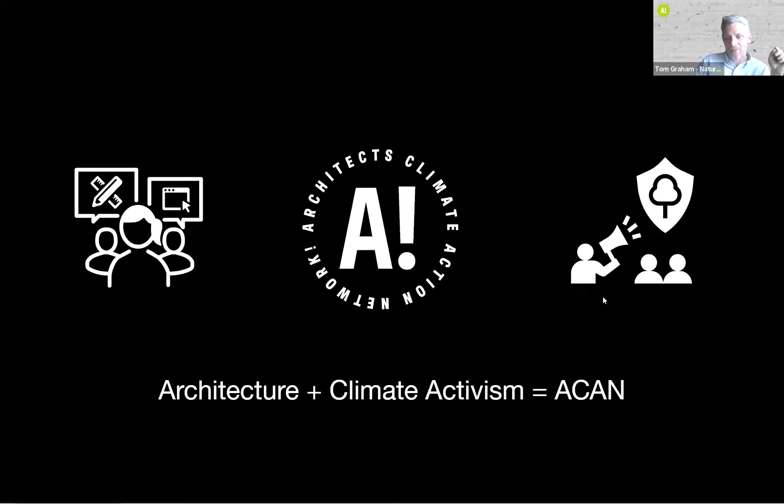And cultural transformation. We call for a complete remodelling of our professional culture. We must challenge and redefine the value systems at the heart of our industry and education systems. We seek to operate an open network to share resources and knowledge to aid in this transition.

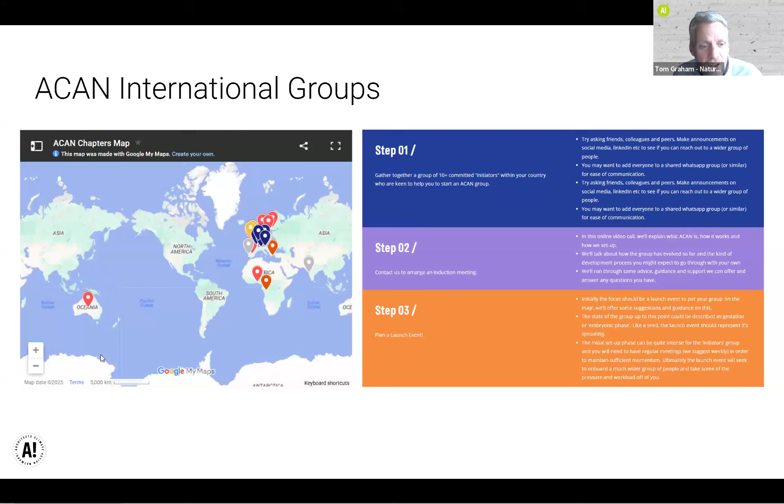So yeah, ACAN's actions take a bunch of different forms, from campaigning, lobbying, and the creation of resources and content. Very much right now, the ecology group have put together a public statement on the rather shocking planning and infrastructure bill. The existing buildings group have developed the UK demolition map, which is a crowd-sourced map of buildings at threat of demolition.

And again, the same group, existing buildings, have the Hug the Building event coming up in May. And sorry, the climate literacy group will be hosting their material donut workshops at Buildfest UK in July. So you can see, busy.

The other angle to a lot of our actions is the provision of resources. And the natural materials group are about to go live with a big announcement shortly, with our natural materials details website with free downloadable details demonstrating natural construction. So the sort of things you're going to be seeing tonight from Seb, Janna, and Andy will be detailed on that website. But anyway, that's too much natural materials.

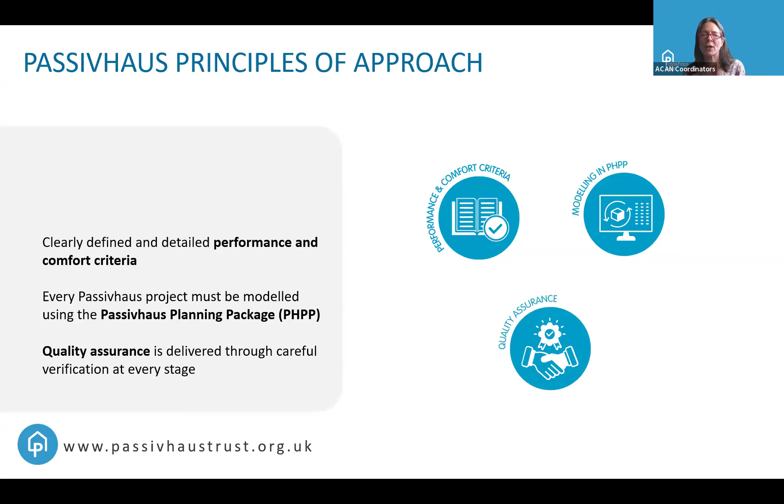So I don't know how many of you know about the Passivhaus standard, but the Passivhaus has principles of approach. It has 3 of them. It's clearly defined and detailed performance and comfort criteria. Every Passivhaus project must be modelled using the Passivhaus planning package. Quality assurance is delivered through careful verification at every stage. And together, that adds up to an integrated approach. So Passivhaus buildings are based on fundamental principles that must form part of that integrated approach.

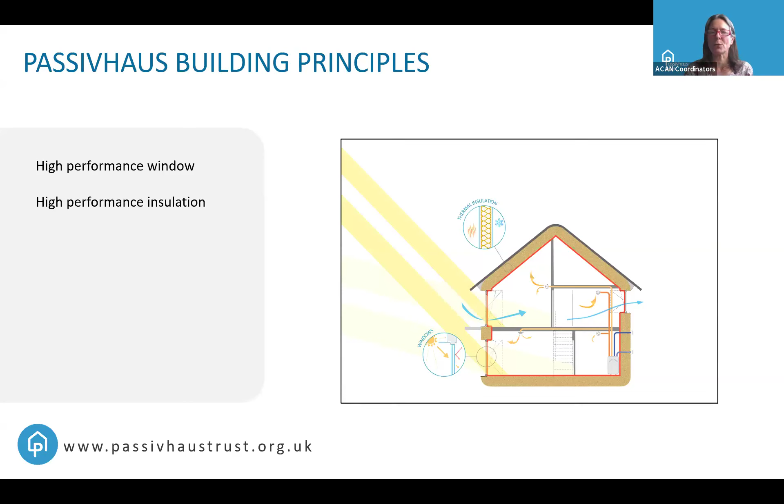There are Passivhaus building principles, of which there are 5. High-performance windows. High-performance continuous insulation with no gaps, a continuous high-performance airtight layer, and minimising of thermal bridges, and quiet and efficient mechanical ventilation with heat recovery, which is MVHR.

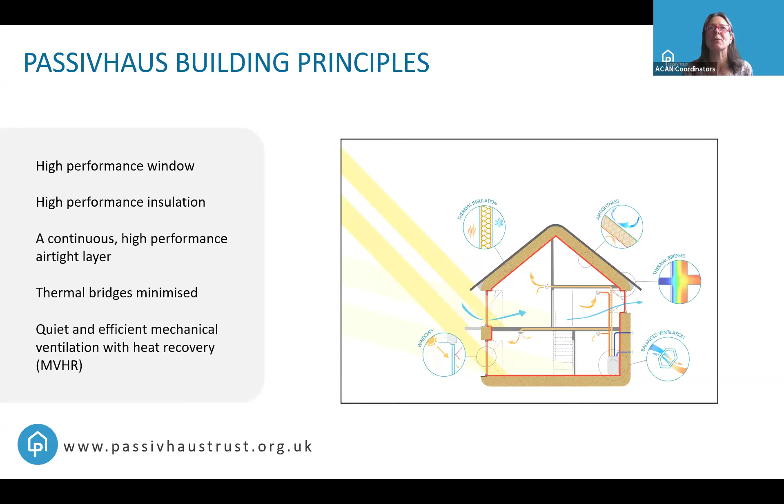Can anything be called a Passivhaus standard? No. It might meet some of the principles, but unless it meets all of them, is designed through PHPP and is quality assured, it is not a Passivhaus.

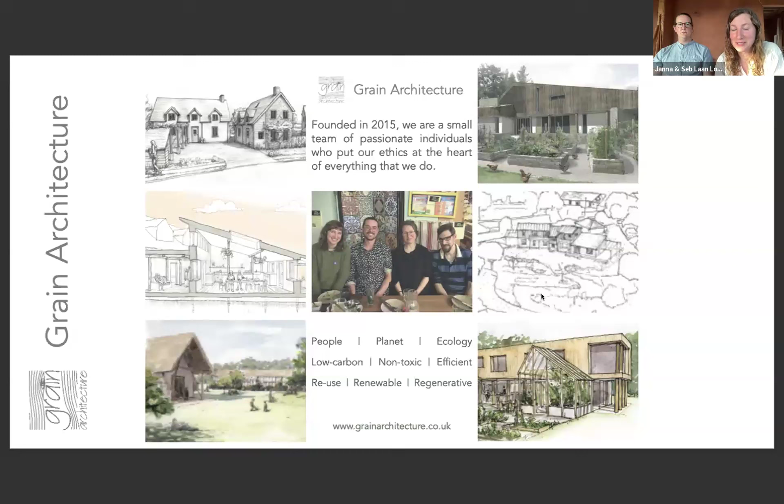yeah, we're obviously here to talk about our house, which is Llama-Croft, a plant-based passive house. Just a little bit more introduction before we jump straight in, but I'm here wearing multiple hats as well. As Tab and Tom have said, I've been part of ACAN as well, but I also founded Grain Architecture in 2015, so nearly 10 years ago, and we as a practice specialize in low carbon building with natural materials, so I have a background in that.

Just to run through a few things that we do as Grain Architecture, we've got many projects that we've done or are doing, from extensions, deep retrofits, working with listed buildings, through to community new build projects. This one needs more funding, so please give to Tuppenny Barn. Shout out.

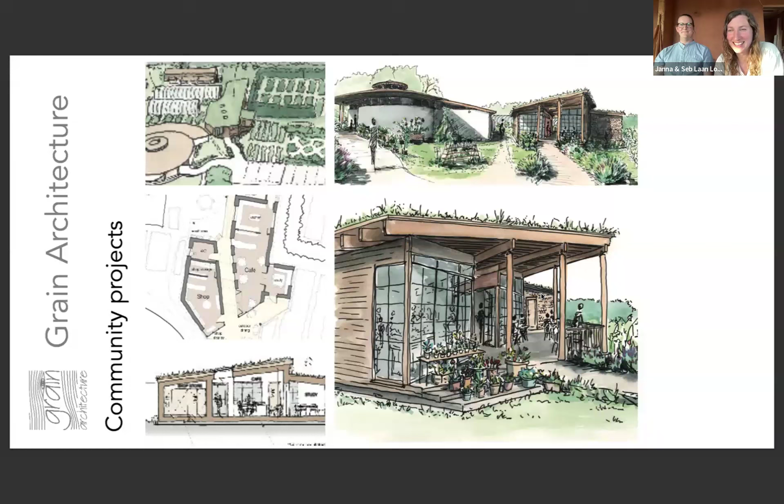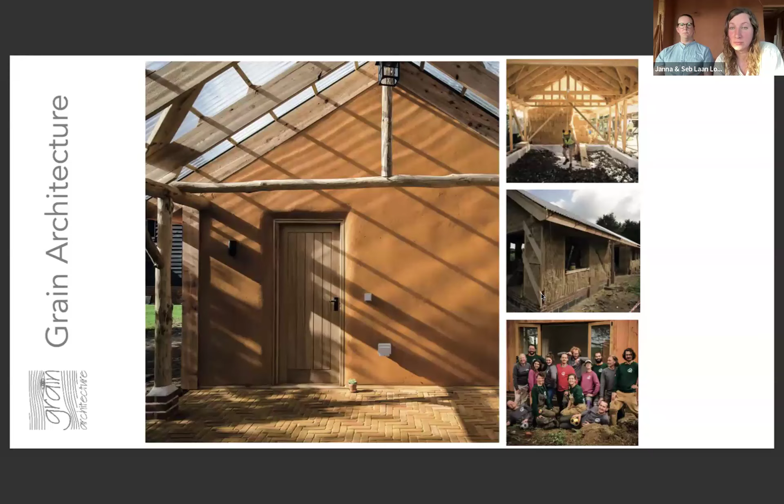So the design of our house is something I've been working on for a very long time. In fact, I was probably about 6 years old when I started thinking about my dream house, and became a bit obsessed, and it's been a pretty lifelong obsession since then. So it's quite amazing to now be at the point when we're sitting in it, which is very cool. I've been working on this design and really trying to refine it, getting a nice simple layout, which I'm very happy with.

And so one of the key principles, as Tab was mentioning about Passive House, is continuous insulation, and also the form factor needs to be quite efficient, so not too large a footprint area for the volume.

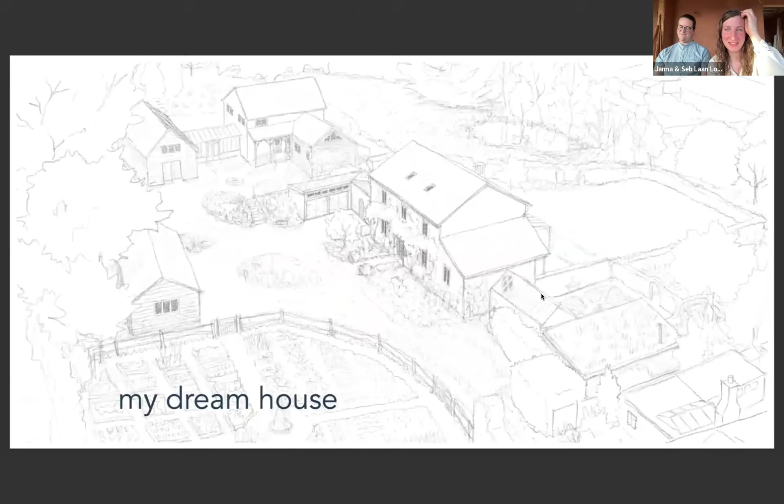So yeah, this house, when I was 6, obviously I didn't know about Passive House, and for many of the years that it was under sort of development, I didn't really think of it as a Passive House, but I always wanted it to be an efficient sort of house that was kind of quite independent and self-sufficient.

So then came along Seb, who I met while studying at CAT, the Centre for Alternative Technology, and Seb works at Archetype, he'll introduce himself, but he's a passive house designer as well, and basically said that it would be okay for me to design our house on the premise that it is a certified passive house. So that's what we set out to do.

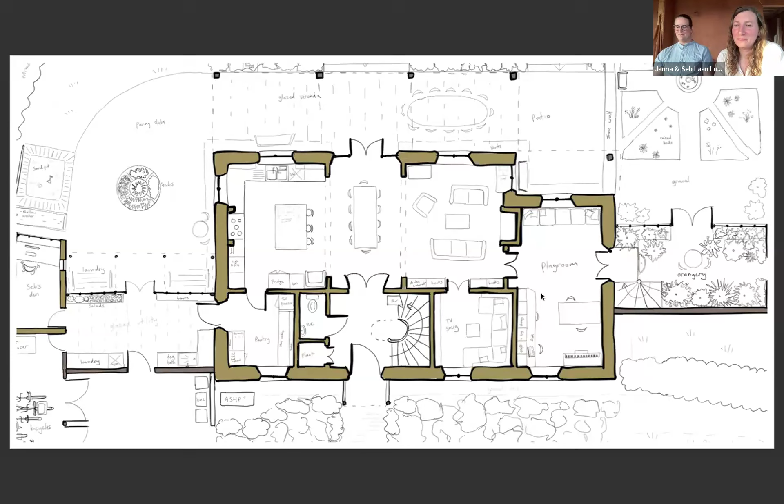So I had the design before the site, which I know is not the right way around, but I've been looking for a long time to find the right site, and this is what we found. And we bought this place in 2022. We're lucky to have found it because it's within a settlement, which is a big issue for new builds. This actually has, as you can see, a little cottage on it. It had a cottage on it. So we had one dwelling on 1.5 acres of land within a settlement outside of the town.

And we've built 2 houses on it. So we've built one for my parents, who I think are on this call.

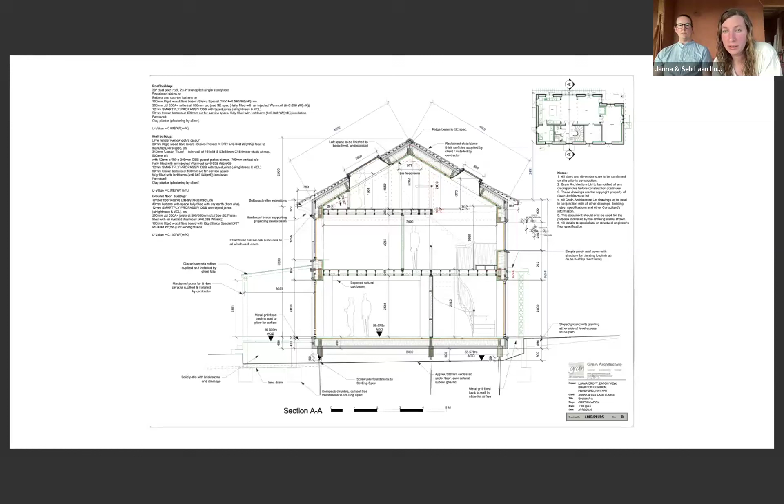So yeah, all sorts of materials, but effectively we're using plant-based hemp fibres and wood fibres, cellulose insulation, lots of reclaimed materials and home, so I wouldn't say homemade because it's clay, you know, but it's from the garden, literally a few feet away.

And I would like to talk more about reclaimed materials and reuse, but I think otherwise I'll be talking for about 2 hours, so I'm going to skip over that bit. But I'll just run through the actual build-ups that we've got.

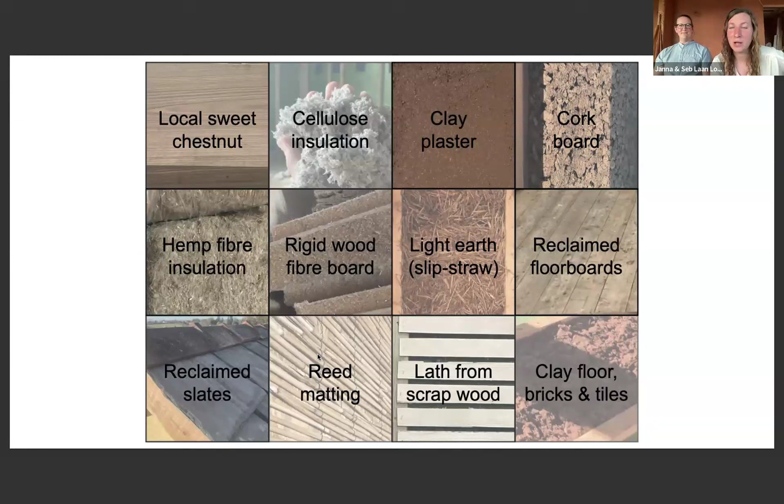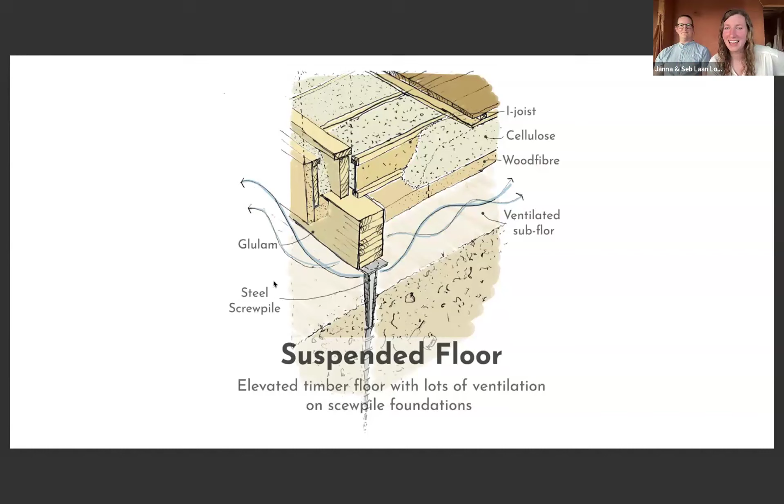Obviously, with the timber floor, you need ventilation underneath, so this is off the ground, and there's a ventilated space, minimum 150 mil, or at least there will be when we finished. And the walls are made very similarly, and this is where, when we were at Future Build, I showed the actual sample panel, which I have sitting here because we've got like a mock-up of our wall.

But effectively, we've got two studs creating the frame. There's an inner stud, which is 140 mil, and an outer stud of 63, I think. And that creates the separated frame, which minimizes thermal bridging. Thermal bridging, I can't really explain too quickly, but effectively it's the passage of heat transfer from one side to the other. So that's what we're trying to separate as much as possible and have continuous layers.

So there's continuous cellulose going through all these gaps in between the two frames, and there's also this continuous wood fibre board insulation. The cellulose, I think, is 320, something like that. The walls and the floors and the roof are 300 mil, and then the wood fibre board insulation is 80 mil on the walls and 100 mil on the roof and the floor. We didn't actually end up insulating the service cavity, but that's because we just did such a good job of everything else. We didn't need to.

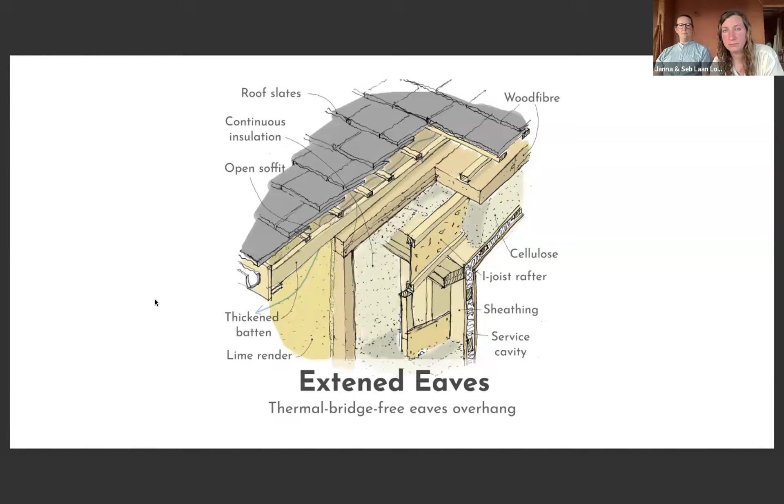We've also, you might notice, got no membranes in our build, no breather membranes, and that's for minimizing plastic, but it's also to enable the roof space to be a bat-friendly roof space. And the insect mesh is also set back to the end of this angled sprocket here, which means that about a third of the roof is given over as a bat-friendly space, and birds as well.

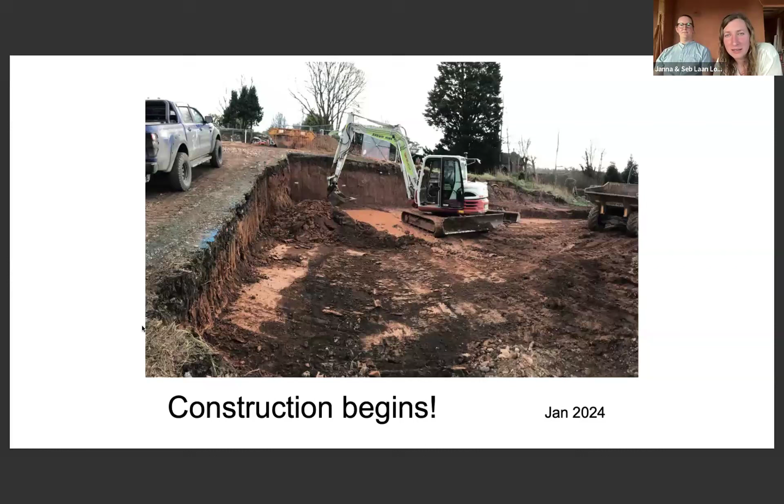So now I'm going to run through quite quickly because of time the photos of construction. So this is when we actually began, and that was January 2024. And there was a lot of clay, a lot of clay. It rained for about 4 months solid, so we had so much mud and clay on site. I know they hadn't put the stone down. This was the old driveway, that's what it was. It's changed so much. But yeah, so that was January.

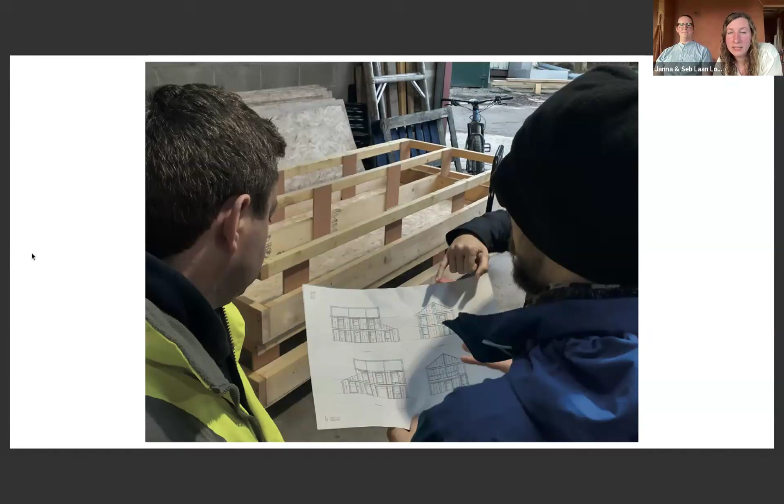Meanwhile, whilst the groundworks were going on, the panels were being made off-site. So this is the sort of workshop where the builders were working. You can see 2 of the panels in the background here that have been put together and ready to transport. Then I think it was March that the screw piles went in, and Seb will talk a bit more about the screw piles, so I'll skip over that.

I think I would have felt a bit worse about digging so much if we had really healthy topsoil that we were then exposing and killing by digging, because it's not actually that great to dig too much. But given that we had no topsoil, it was an opportunity to do the groundwork and now build it up.

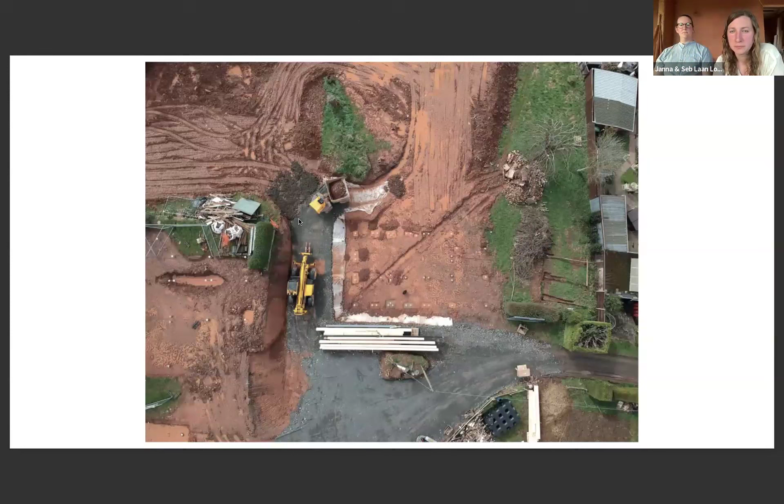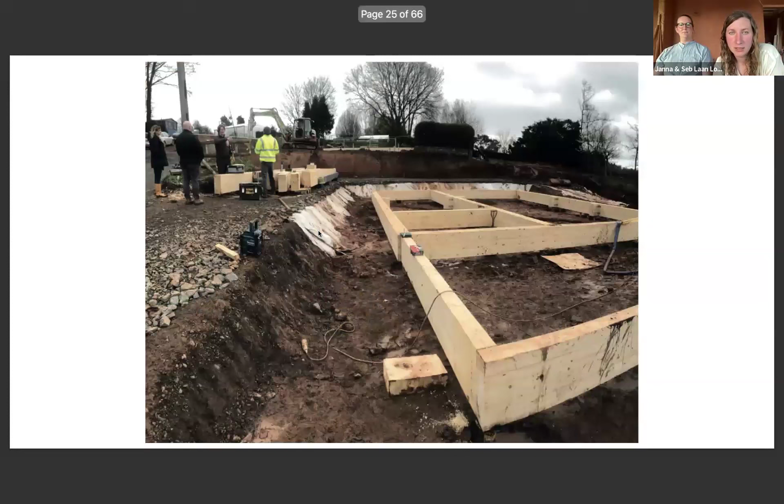So yeah, this is when the glulam ring beam went in, sitting on the screw piles. And there you can see it sitting there on the mud. And somebody had the fun job of climbing underneath and fixing the wood fibre board to the underside.

And you might notice that the floor joists and the wood fibre board layer is actually all sitting on top of the glulam ring beam rather than within the same plane. If it was in the same plane, you would need joist hangers effectively, and we wanted to minimize joist hangers as much as possible. So that was a reason, but it also made it much quicker on site to build because it was sitting things on top. And there you can see the wood fibre board.

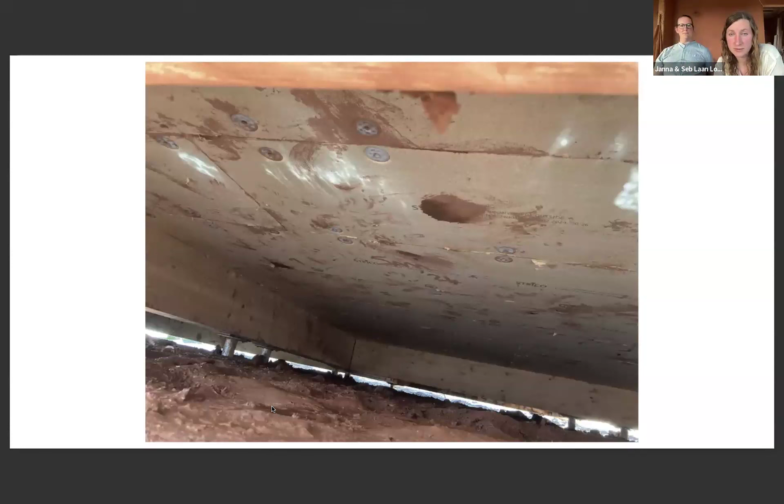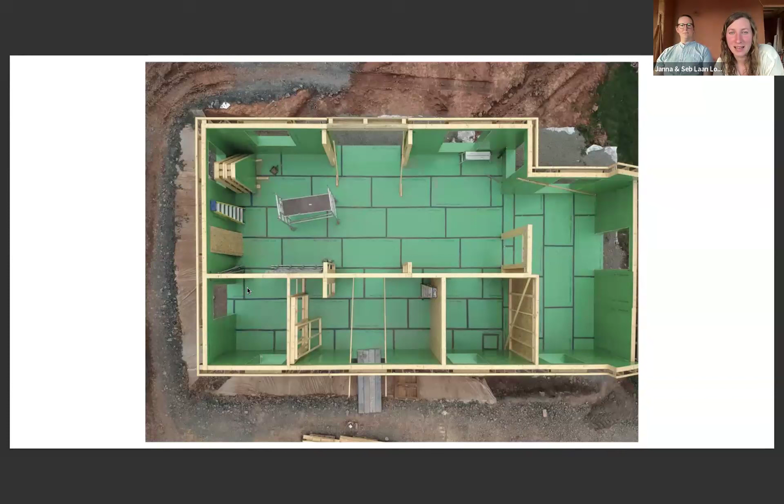Then very quickly the panels arrived for the walls and up they went in no time at all. We had a ground floor and it was, yeah, a really exciting, big moment. It kept raining, so it got wet on site, and initially I was very worried, but actually it all dried out and I was reassured, and it's not been a problem.

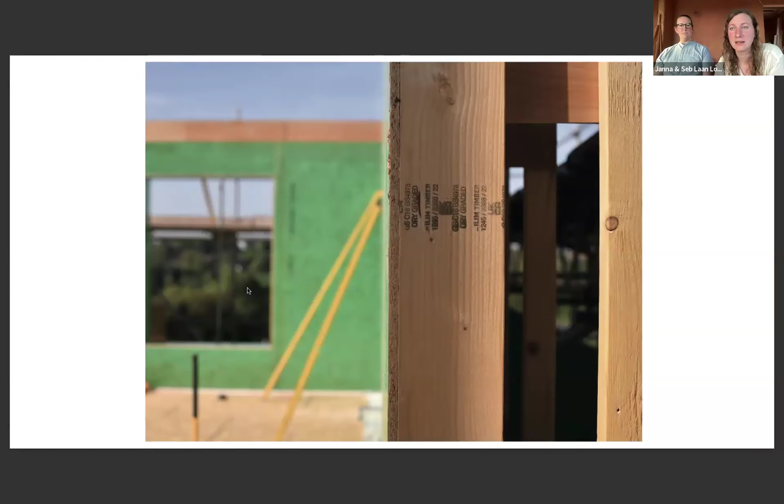And this is just a close-up showing the C16 grading of all the timber. So it's not C24, C16, which means it can be UK. Are you going to talk about that? Right. Yeah, so C16 means that you can basically use British timber, and we have loads of lower grade timber in this country, but engineers like to spec high grade timber, and that often means you have to go abroad to get it. So it was really nice to be able to do almost the entire house using C16, which enables that locally sourced timber.

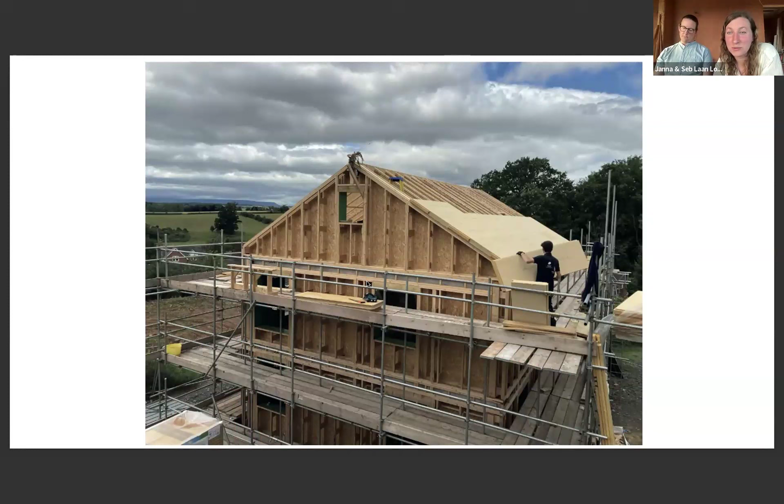And then the wood fibre board went on, and that instantly gave us rain cover, and it then sat there exposed to the rain. Wood fibre board does amazingly well at this. It's something that you might think is very susceptible to water damage, but actually it can be left out for a very long time in the rain, like months, and it's been absolutely fine.

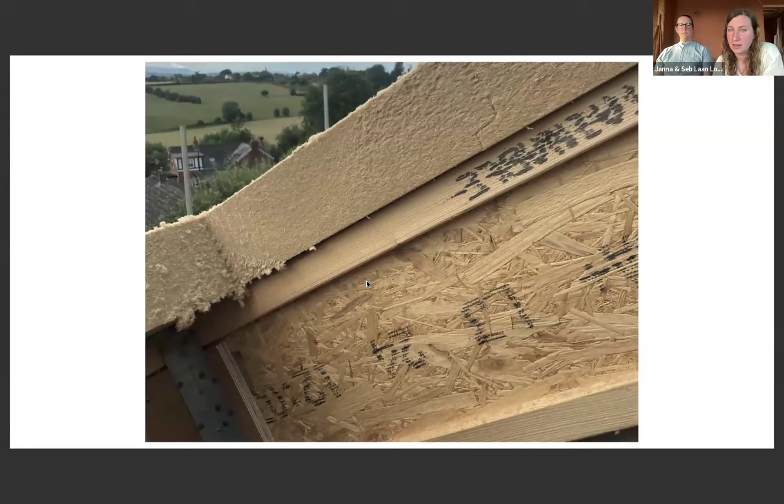Then we had some slates. I really enjoyed finding some nice reclaimed slates. And just for comparison, you can see my parents' house in the background there with its new Spanish slates compared to our far superior reclaimed Welsh slates, which apparently came from a castle in Wales. I need to find out which one. It's very exciting. They're huge, heavy, and they're all slightly different.

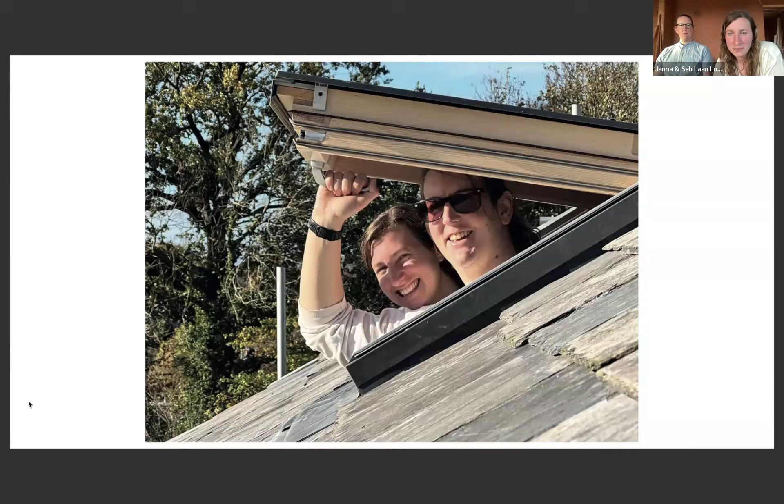And I insisted that they put them not perfectly, because I like things to be textured and imperfect and handmade, rather than looking like it's all too flat and machine made. There's Seb putting some moisture meters in. He's going to talk more about that.

And then the windows arrived. So we're now into the summer. Well into the summer, actually. It was August or September even, I can't remember. And yeah, windows and doors all went in. These are all triple glazed timber windows and doors from 21 Degrees. And there weren't a lot of options with this, because I was looking for a timber window and door, not a composite material, and not with aluminium on the outside, just timber really.

So yeah, not as many options out there, because a lot of the high performance windows actually are more composite, but these are made of Accoya timber, which is very stable. But that means it's engineered timber, so we went for a painted blue colour, because if you leave it natural, it doesn't look as you would think a timber window would look. You can see the kind of finger joints and things. So we decided that actually painting it was the best thing.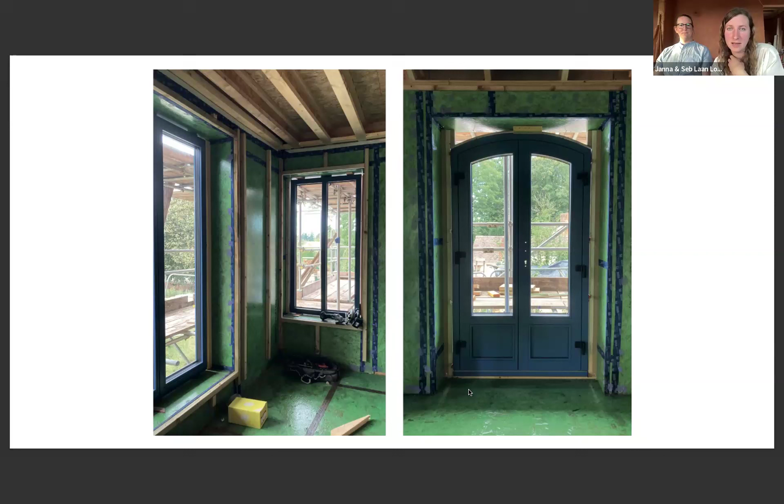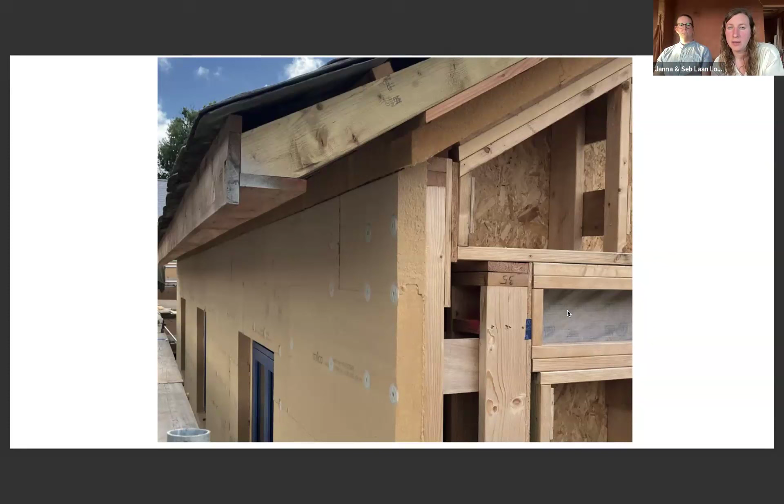Meanwhile, we were seeding up lots of lovely wildflowers and growing things, and as I said, building up the soil is important to us. We're also doing a lot in the garden with vegetables and things like that as well, planted an orchard and things.

Meanwhile, this was in the summer, late, we're now into autumn I think, when the render finally arrived and went up. So we've used lime, and you'll see that lovely rounded corner there. That was hacking away at the corners because I didn't like sharp edges. Normally you would have a sharp edge and a plastic beading to strengthen the corner, but I went at it with a knife and took the corner off, which means that you don't need the plastic beading. So that was a nice little win.

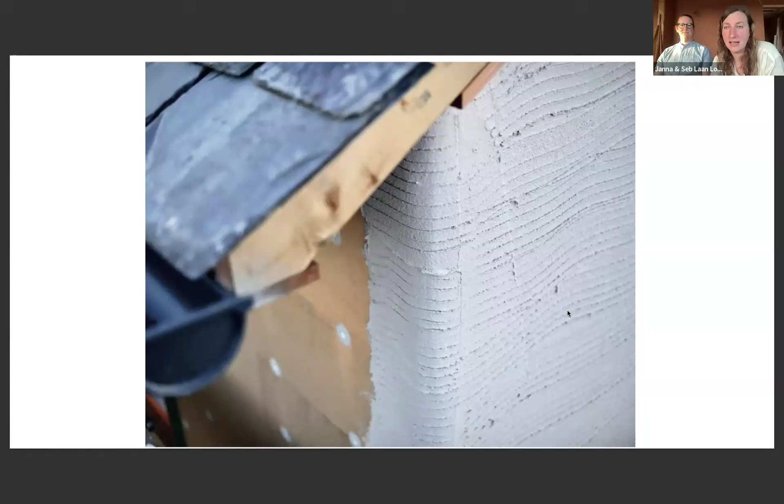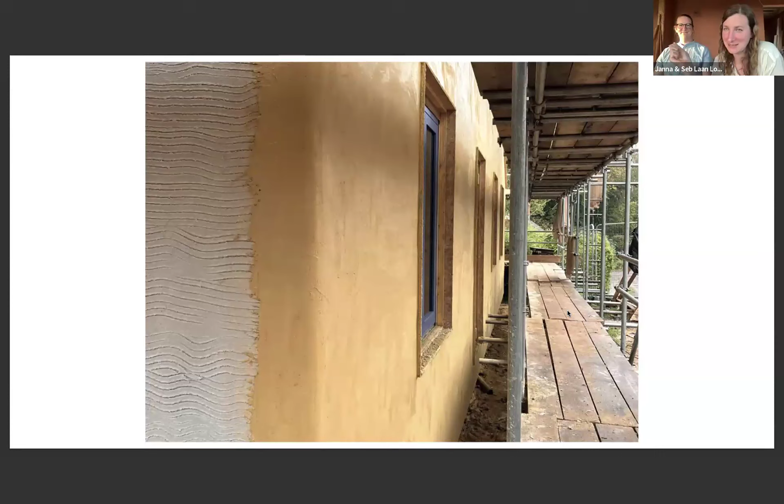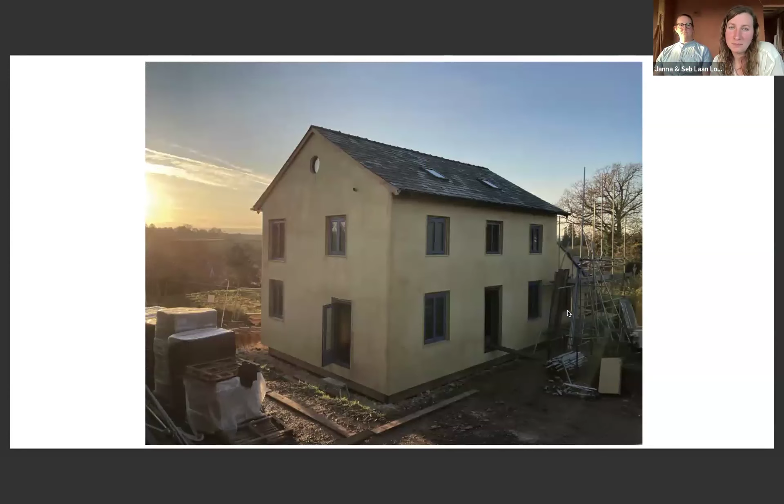And then the render goes on in 2 coats with base coats, with a scratch in it, and then the top coat goes on, which we went for a pigmented top coat so that we don't have painted render. It's also done very roughly on our instruction, rather than perfectly smooth and flat as they wanted. We wanted it a little bit more rough and ready, which I really like, and I think it looks much more characterful and rich. So that was it, looking rather lovely.

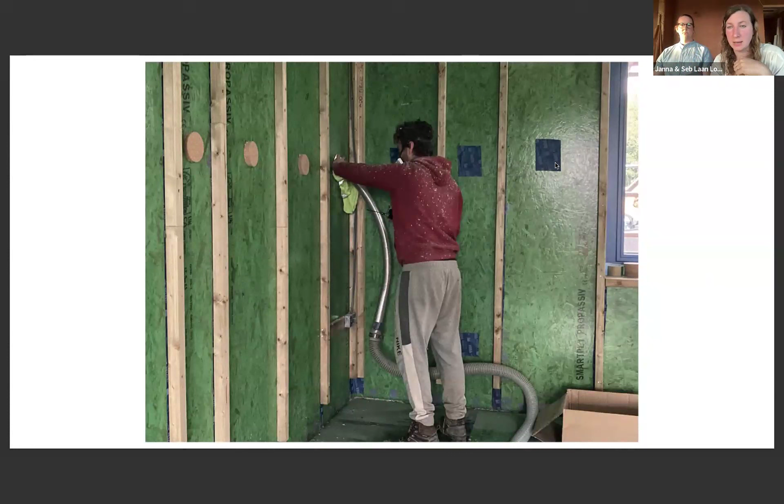And then this was getting up to Christmas when we got partial possession. Actually, just before that, they insulated the inside. That's all to do with the shell. Then we come to the actual insulation, which is pumped into all the voids after the shell is complete. They do this from the inside by drilling a hole and putting the cellulose machine in, pumping it full, then slowly pulling the nozzle out when it's at the right density and pressure, and then they tape up the hole with this blue airtight tape. And here you can see the cellulose made from shredded newspaper.

And then basically we got to take it from there. So all the insides we are doing ourselves. For some of the internal walls we were putting light earth in, and light earth is a mixture of straw and clay slip, and you coat the straw very lightly in clay slip. We were doing this in the internal walls for acoustic insulation, but also thermal, and also a plaster carrying surface, and it costs next to nothing. It takes a bit of labor and a bit of time to dry, but I'm really happy with the result personally. It's been really lovely to work with.

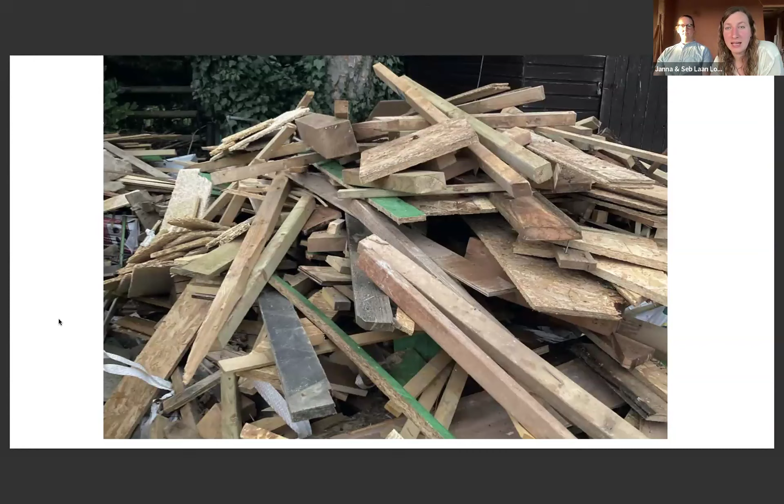But this is what we get from a building site, even the good ones. There's a lot of waste, a lot of offcuts, and yeah, it's very frustrating. I hate waste, so I've been, much to my parents' dismay, having piles of scrap material everywhere. But this is a really valuable resource as far as I'm concerned, because we've been ripping this up into lath and stapling it onto the walls and then plastering onto it, which has worked really well.

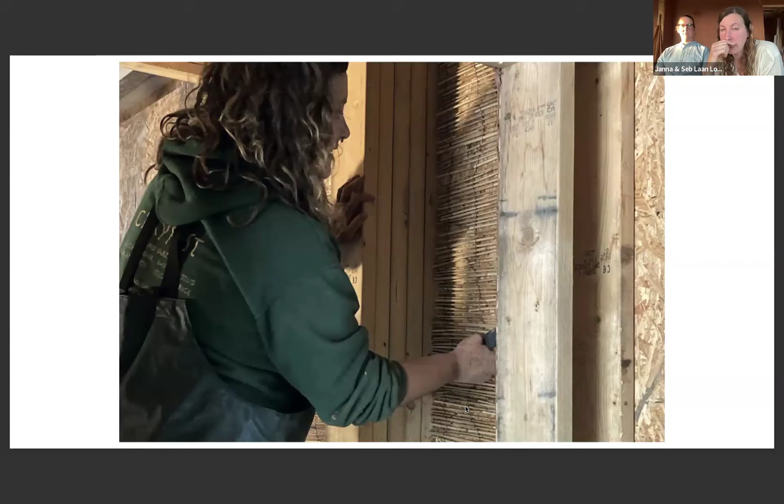We've also been using reed matting. So this we were stapling straight onto the OSB board, the sheathing board on some of the internal walls, and then again plastering onto that, and that worked really well. So yeah, mixing up the plaster, we've got clay, lots of clay, plenty of that.

We very simply mixed it with water, made it into a nice thick clay slip, poured it through a sieve to get the bits out, and then let it settle a little bit to get the right consistency, and then mixed it with fibre. And we had the fibre as well, because we've been using the waste from the wood fibre board.

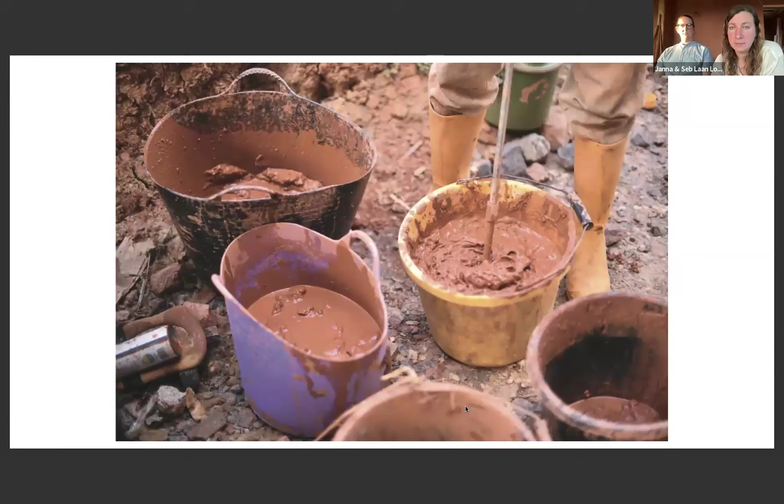I haven't got a picture of that, but the wood fibre board that we've been using as insulation, every time you cut it, it creates this kind of very fine fibrous dust, which is lovely fibre for plaster. And you can sort of see the flecks of fibre, it's very fine, but it works really well, and I highly recommend it. So yeah, we put that onto the reed, onto the light earth as well, and onto the lath.

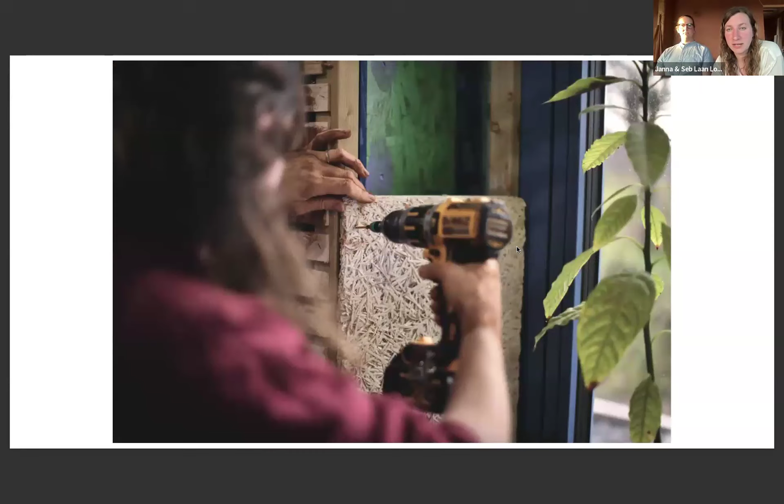And then yeah, so this is our kitchen. You can see there's a bit of a light earth wall here, but then the external walls we used the lath to cover, and then we've done this detail around the windows as well using scraps. So this is wood wool board, so that's waste. It was dug out of the skip, but that is perfectly good for creating sort of small patches around the windows and doors.

And then you can see the lath all over the walls, and then we've sort of given them a quick brush with clay slip just before plastering, because that helps with keying. But yeah, we've had loads of volunteers come and help with this, and it's been really good fun. And that's it plastered, which is looking lovely.

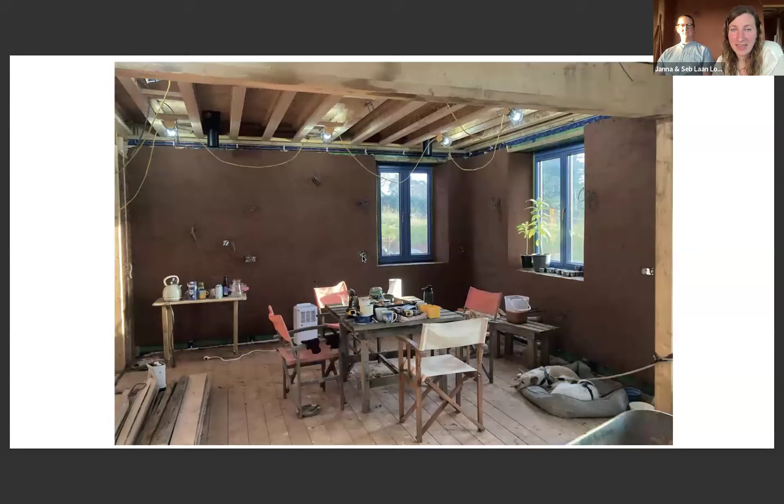Yeah, and then skip forward to a photo I took yesterday, and we've actually now painted the walls. We've got the ceiling plastered, and we've put a bit more of a camp kitchen in for all our volunteers who keep coming and helping out. So shout out to anyone who wants to come and volunteer, please do. We've got a lot more to do still, so we would appreciate more help.

Yeah, it's been a really nice journey, and it feels so nice in the house. It feels so comfortable, and everyone comments on how it just feels good. The smell is right, and it's something about it. The atmosphere is really lovely. So yeah, come and have a play with some clay with us.

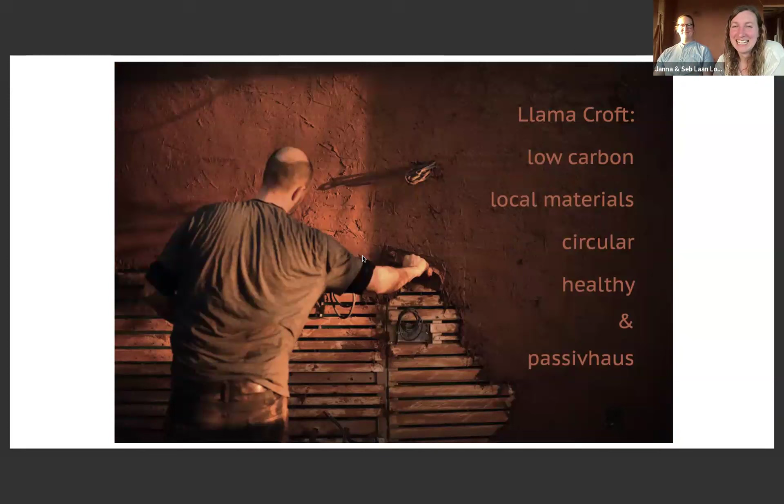That is it. I'm going to pass on now, I think, to Seb. I'll just switch over. Hang on. Shall I? I'll just start sharing again with Seb's. Brilliant. Yeah, thanks.

Good evening, everyone. It's really nice to be back on an ACAN call. Janna and I were reminiscing. This is basically how we spent our lockdown. Rushing from work, cooking some dinner, and then spending an evening on Zoom with some other people who were too frustrated at the inaction in the industry. I was doing the embodied carbon group and Janna was doing the natural material group, and we were on separate calls. It was hilarious. So it's really nice to get to be presenting back to the community and seeing that it's still thriving.

Yeah, absolutely. So I'm Seb Lomas. I'm an associate at Architype, 3 studios in Hereford, London and Edinburgh. And I'm going to talk a little bit about the screw piles that Janna mentioned, and then also moisture management.

So starting off on the ground screws, this is something that I'm really glad we were able to do. When we were at university, screw piles were seen as the cool, great way of avoiding the huge environmental cost of foundations. And all the projects I drew had screw piles. And then when you're in the commercial world, it's very rare that you get an opportunity to actually use screw piles.

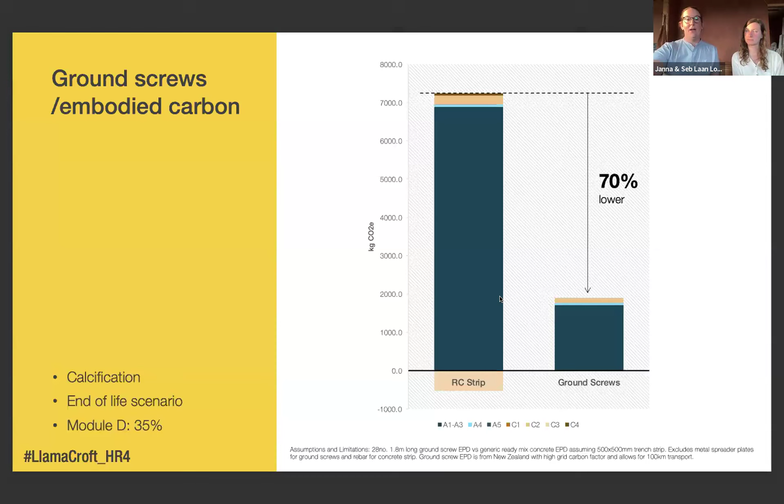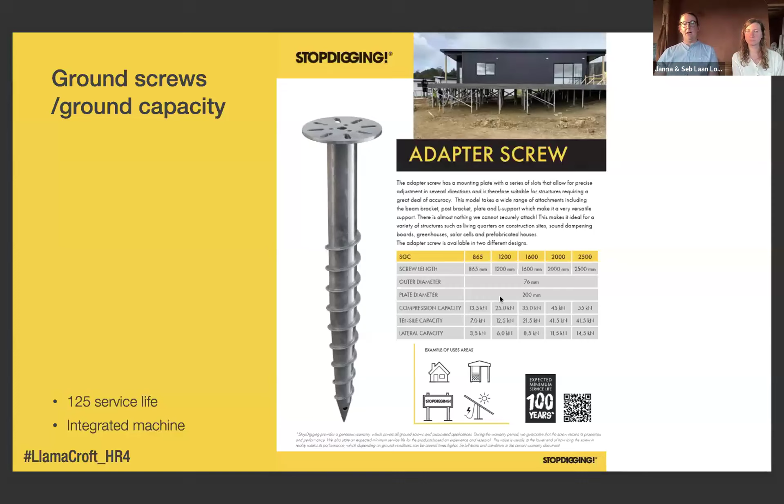And quite interestingly, they can be sized specifically to the loading requirement of the building. They come in all shapes and sizes and have a 125-year service life, but there's no reason why they shouldn't and won't last significantly longer than that. And they go in the ground with basically a massive screwdriver, which is an amazingly low tech, fast and cheap solution. And quite interestingly, the contractor we were working with for this project had never used screw piles before. And having done so, they said it was cheaper, easier, faster, and more enjoyable than a concrete foundation.

They've basically said they want to adopt it as a system, and they're now licensed as a Stop Digging installer, and have already looked to swap concrete schemes of theirs to screw piles, which is absolutely fantastic. That said, I've spoken to other people about doing screw piles, and some quotes that people have been receiving are extremely high. I think it was £8,000 for the 2 homes for the screw piles. And I've had friends with garden rooms in London being charged over £20,000 for 10 screw piles. So you have to look around a bit.

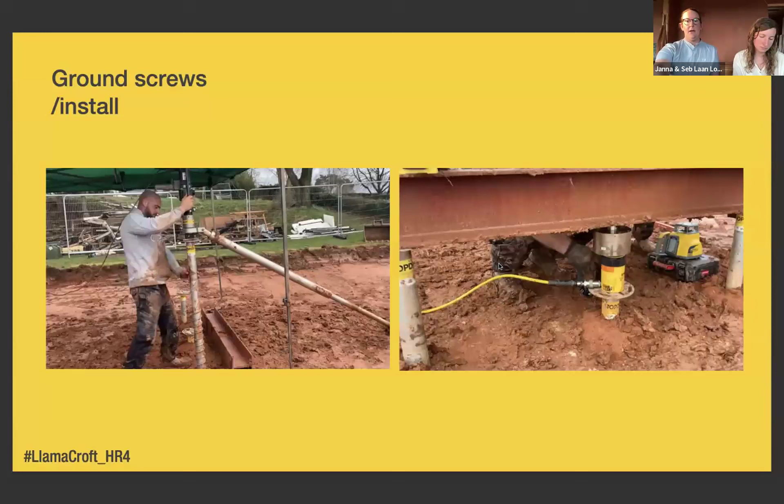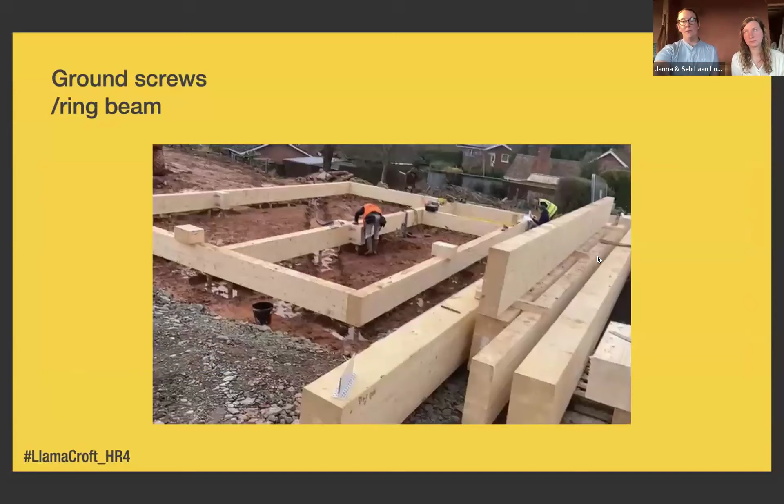And then, as Janna said, the glulam beam very, very accurately sits on top of this. Similarly, I've heard people have really bad experiences with putting in screw piles and finding it hard to make them accurate. And it wasn't our experience at all. And it was really enjoyable to see how precisely everything went together.

So the other thing I'm going to talk about is moisture monitoring. And I don't know if people will be familiar with this, but there was a recent payout of over £100 million for a Sky building, which had a mass timber roof that suffered from water ingress and then was basically condemned. And that single payout means that there are now more losses from water damage than fire damage as an insurance model, which basically means that when you speak to an insurer now, the primary concern is not fire, it's water.

And it's quite interesting because for the last couple of years post Grenfell, there's been a lot of energy in the industry about addressing the fire concerns. And there's been a fraction of that focused on water. And there's a lot less guidance out there. I've put the mass timber insurance playbook up there because it does have some information in there about water. But there's a big gap in the industry when it comes to sufficient guidance for designers taking it through a design scheme and courting the insurance market, as people put it.

But positively, there are some insurance providers who are very keen on the idea of using data to drive insurance profiles. And I know an insurer who basically says, well, if you show me the data that your building is dry for a year, I'll give you a lower insurance premium, which I think is really exciting. And also builders are quite keen to have the data on their buildings, because then they can tender for the next job and say, look, we've delivered dry timber buildings and here's the data to back it up. So people are quite keen on the idea of getting this data.

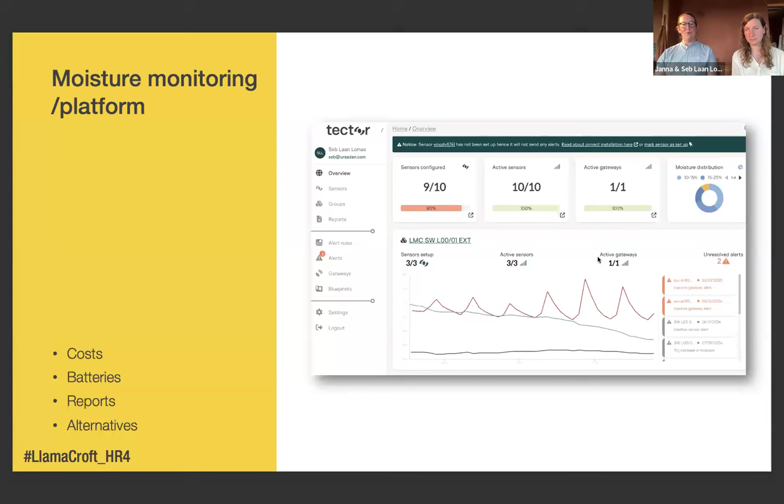The sensors have got a 10-year battery life. So the idea is you build them into the building as you go, recording them as you install them. And then for 10 years, you'll have that operational data. And of course, something could go wrong in year 11, but at least you've got that certainty for the first 10 and the anticipation that things will continue in such direction. The website basically then just live draws all the data. You can automate reports if you were an asset manager or responsible for the building or going for your insurance premium. And yeah, there are other platforms out there. This is just the one that we used.

So as you're building the building, you pick where you want to put your sensors. There's no industry guidance about how many or where. So we did it from what we wanted to learn from the building perspective. You take photographs as you install them, so you've got that record, and then you tag it with all of the metadata, like what have you screwed into, what type of wood is it, insulated, uninsulated, and then it's recording humidity and temperature around the sensor, and the moisture content between the two screws that go into the wood to fix it.

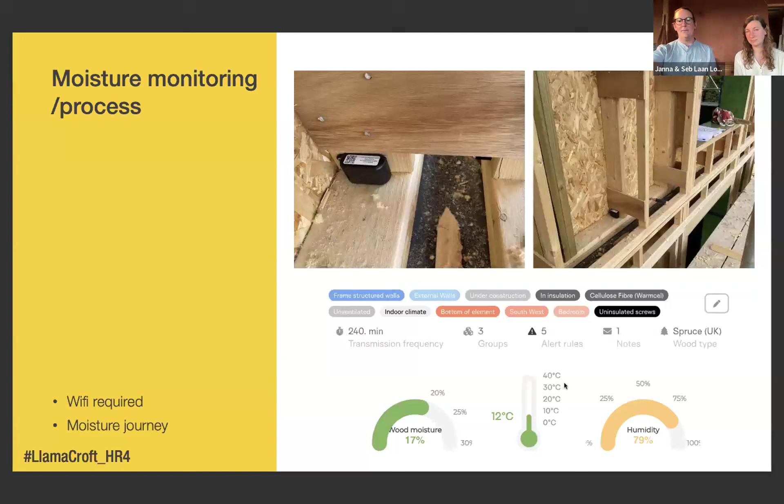And if you wanted to, you can install them in the factory and then actually collect the data as it's going from the factory onto site through the assembly process. So you've got the whole moisture journey of the building, which I think is really interesting, especially when you're talking about mass timber, which is harder to dry out. Fortunately, the section sizes on this house are very small. So even if the timber did get very wet, it did dry out relatively quickly.

So we decided what we wanted to learn from the building. So we've put a number on the southwest wall all the way through the build-up. So we've got the moisture journey through the wall. We've got 2 in the floor, 2 in the roof.

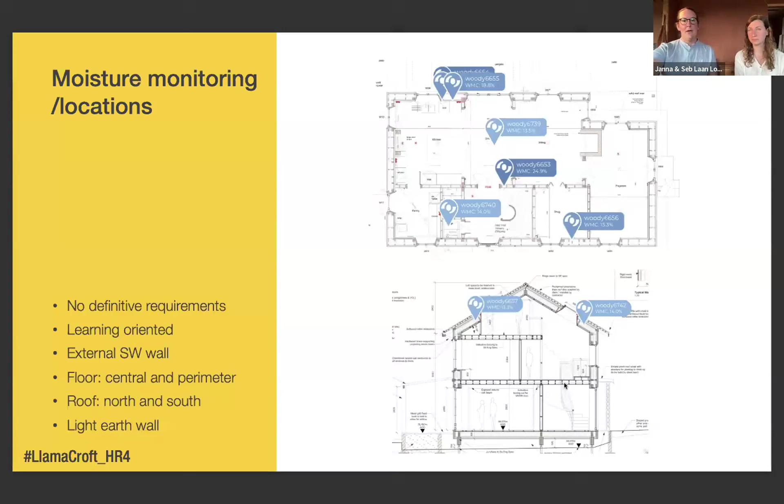And then we've got one which we had in this internal light earth wall that Janna mentioned. And it was really interesting that we did that, because it is what highlighted that it wasn't drying out against this OSB. So we intervened, we drilled some holes, and it's dried out nice and quickly now. But we learned that lesson.

On the roof, Janna said that we wanted to have a kind of bat-friendly roof. So we've got no insect membrane, and we've got these reclaimed roof tiles, and then it's basically battened straight onto the wood fibre board. So again, we were quite keen to be able to demonstrate that works from a moisture perspective and from a resilience perspective.

Just to say that should be breather membrane rather than insect membrane, because we have an insect mesh on parts of it, but the breather membrane is usually the rain barrier.

Yeah. Sorry. No, it's a good point. Live critique as I go.

I love it. Sorry. So then we've got two in the floor, and the data here is basically just showing that the frame was slightly wet when the insulation went in, and then the wicking element dried it out very quickly, and since then nothing exciting has happened in the floor.

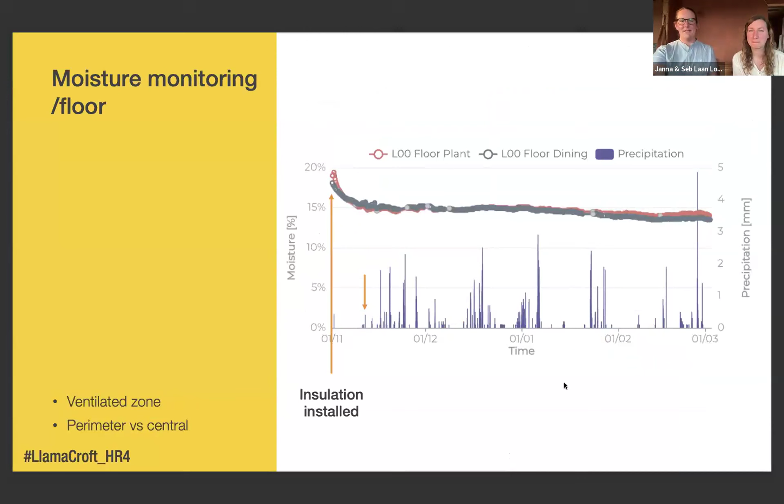And then this is the external wall. It's showing some interesting things here. So the dark blue is the timber on the outside face of the Larsen truss, and the red is the timber on the inner face of the Larsen truss. And you can see that the outer timber is being really affected on a diurnal basis by moisture content and temperature, whereas the red line, the inner one, is completely unaffected by all of this activity that's happening on the outside.

So we can see here that the timber on the outside of the building is absorbing and desorbing moisture on a daily basis in response to the temperature of the outside environment, but very positively, the inner timber frame is completely unaffected by that. So we've got that whole breathable buildup that's allowing that activity to happen without it having any long-term impact on the stability of the house, and also showing that thermally it's very unaffected by the ambient temperature, even though we're not even heating the house yet.

What's the light blue one? The light blue line here is the service cavity, which is on the inner face into the kitchen. And basically it got very wet because we were plastering, which is what you can see on the left-hand side of the graph. And then as the plaster dried out, the moisture content in that timber came back down to below 20.

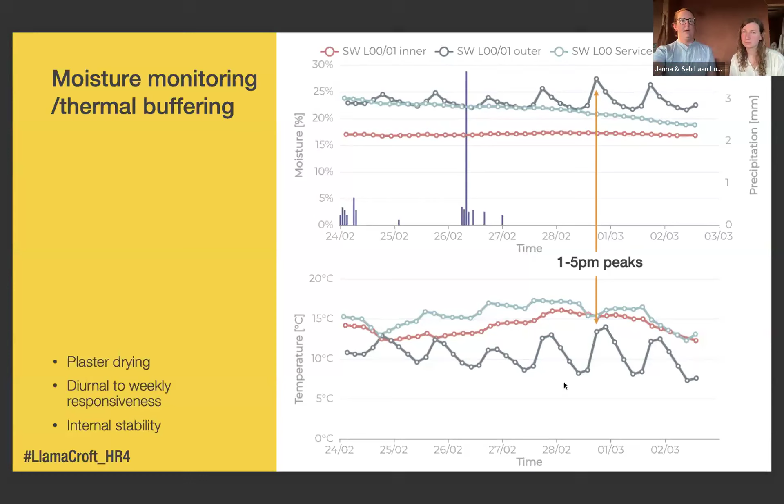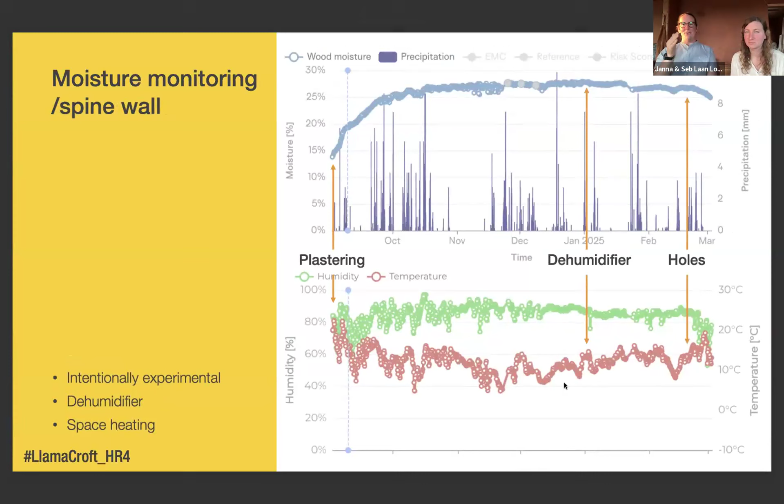And then this is the spine wall that Janna mentioned that we did the light earth on. And you can see that the timber before the light earth went in was at 15%, super dry. And by the time we finished all the light earthing, it was almost up at 30%. And then we intervened and it's now brought it back down. But really useful to be informed by the monitoring.

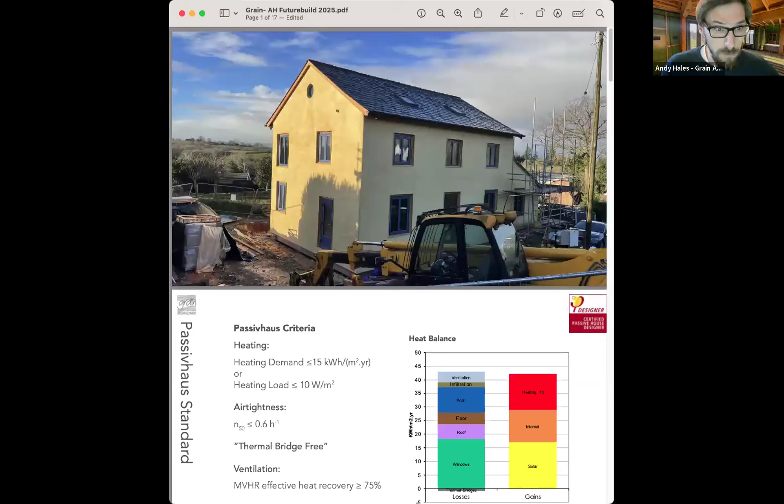Okay. Hi, I'm Andy. I'm one of the directors at Grain Architecture along with Janna. I'm also a certified passive house designer. I trained on what was then the AECB WARM passive house course. And I'm the delivery architect on this project.

So this goes back to some of the things that Tab was talking about at the start of the project, which is the criteria for what defines a passive house. Because to design a passive house, you basically need to enter all the information about the building into a very large spreadsheet called PHPP, which is the main tool that's used to model the behavior of the building with local weather data for the building site. So you have to enter in all the areas of all the walls and windows and doors and how deep the reveals are and everything.

And basically that generates some key numbers, which are the numbers you need to achieve. Some of the key criteria are the heating demand. So you need to have a very low amount of heat required to heat each square meter of the building, or an equivalent maximum heating load for the year. A very strict air tightness requirement of less than 0.6 air changes per hour. And the requirement to have minimal thermal bridges or be virtually thermal bridge free, and I'll talk about how that's possible with the way Passive House does the calculations later.

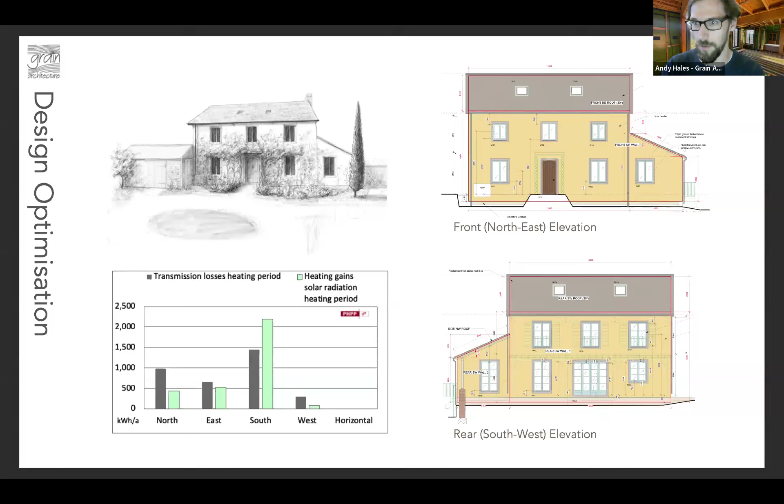The other big thing in terms of having an efficient building in PHPP, and more generally, is having an efficient form for the building. In Passivhaus, that's considered in terms of form factor, which is the heat loss area. So that's the external fabric of the building that's losing heat, divided by the treated floor area, which is the measurement that Passivhaus uses for floor area, which is slightly more accurate and detailed to calculate than standard UK measurements, as the Germans like to do things more accurately quite often.

Some of the design features meant this wasn't as optimal as it could be, but were done for aesthetic, spatial and design purposes. There's a large open stairwell to create a really nice feeling of space over the entrance, and the room in the roof reduces the headroom on the second floor, so that reduces the area. But that was restricted partly by planning restrictions on the height. That's partly why we're having to bury the house down, and also the design of not making too large a building. So there's compromises, but overall it's still coming out pretty efficient at a form factor of 3, which is about where you want to be for a detached house. It's about 3 or better to achieve Passivhaus.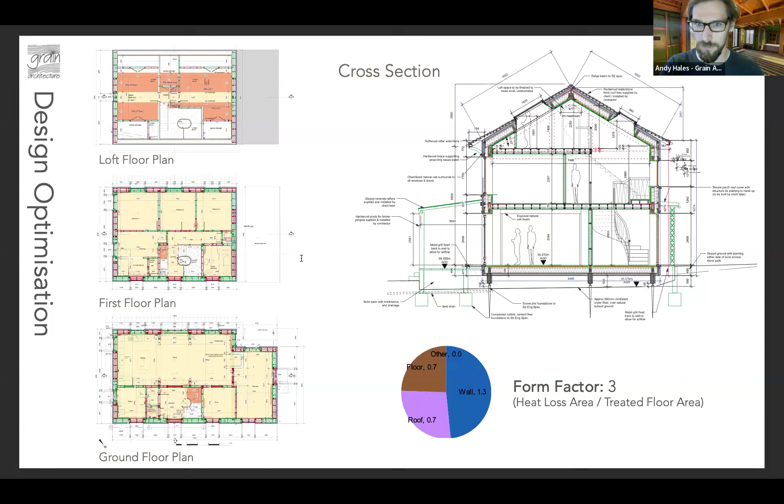So the key thing with Passivhaus in terms of the fabric of the building, the walls, floor, and the roof, is to get, as Tab mentioned, a high level of insulation, which is continuous around the entire building. And that was achieved by essentially having the same system all the way around the building, with very slight differences. So as Janna said, we have screw piles supporting glulam ground beams with timber I-joist floors, filled with Warmcel recycled newspaper insulation, rigid wood fibre underneath, and then flooring and airtight board on top. And that is essentially the same way the walls are built, except the walls were done prefab as the panels, as Janna showed.

And one advantage of that is you get very high tolerances in terms of the design, going to a couple of millimeters, because it's all done in a warehouse with relatively simple tools actually, but to quite high levels of control compared to site construction.

So ideally for Passivhaus targeting, your building system wants to be able to achieve a U-value of around 0.1. I can't remember the exact values, but they average around 0.1 on the project. And as Janna mentioned, the repeating thermal bridges from the I-joists in the floor and roof and the spaced studs in the walls mean that there's relatively little continuous timber all the way through the walls, floor and roof. And with the rigid wood fibre wrapping the entire way round, it's got a pretty good continuous layer of insulation between the Warmcel and the rigid wood fibre.

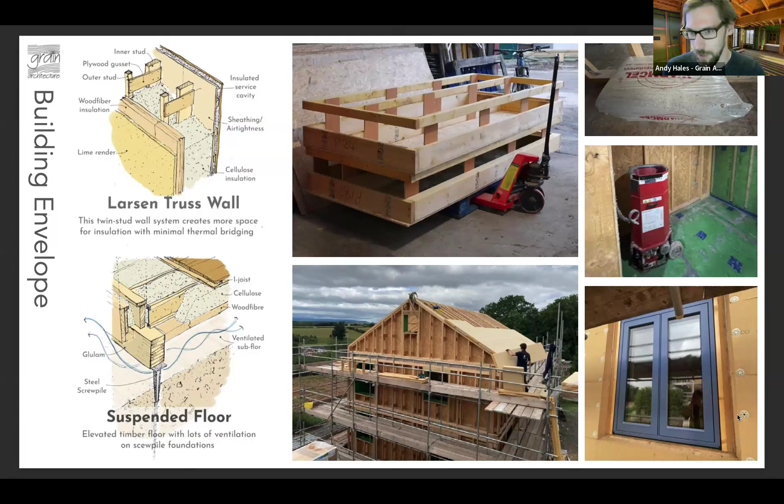So on the inside of all those elements, the wall, the roof, and the floor, we have the airtight board. I think they've renamed it now to airtight board or something; it was Pro-Passive when we were doing it. So that creates a continuous layer all down the inside. And then all the junctions, penetrations, and surface penetrations, and any screw holes that go through it, that needs sealing with either airtight tape or airtight paint. So that's the blue patches, the blue lines, which are all the junctions with the windows and everything, and some of the screw holes. Then we've got some airtight paint, which is the purple bits you can see.

And then on the inside of that, we have a services cavity, which is 45mm deep on the walls. It probably doesn't need quite as deep as that, although it was quite useful for getting more things in there. But that was because we were allowing for the potential to increase the insulation slightly more inside of the airtight layer. In the end, once we got our airtightness test, we didn't actually need quite as much insulation, because it was more airtight than you have to allow by default in Passive House.

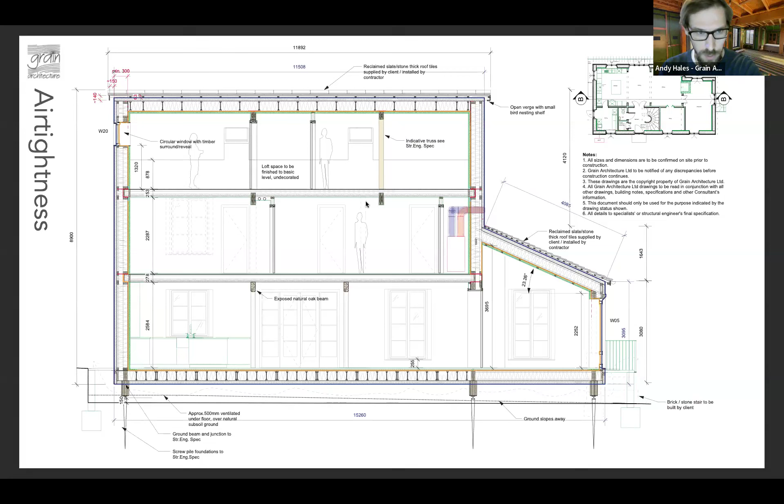So those were the areas we had to use a little bit of airtight membrane. It's a lot easier to deal with these sorts of issues if they're thought about in advance. So before any structure was put on top of the truss, and in fact before it was even inserted into the walls, it was wrapped with airtight membrane with all the joints sealed and taped so that they could then be taped to the airtight layers as they came in.

And similarly in the walls, where the internal floors meet the external walls, the ground floor walls were built first, then the first floor is built off the inner stud, but it's already wrapped with membrane. So you can see that white membrane there. And then a little external wall was built to build up the difference. And then the next floor is built up from that layer, sitting on top of that already wrapped airtight layer. So it's slightly awkward, but if it's planned for in advance, then it can be quite a neat detail.

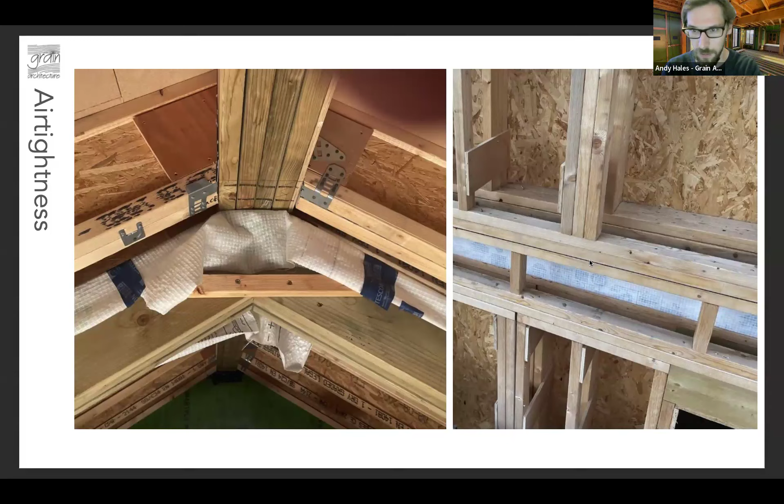And then where the lean-to comes in, that membrane wraps all the way down round that whole panel, and then that's boarded and taped to the airtight board afterwards.

There was one particular point which wasn't picked up, which was essentially something that wasn't planned for: the way the contractors had always been building, they had the header and binder of the internal walls interleaving with the inner leaf of the external walls. So you can see that that top timber is actually going through the airtight layer, which wasn't necessary structurally, it was just their standard detail.

So that was something that had to be dealt with on site. It had to be cut back, the junction taped and sealed up. So it was an error, it's picked up, and it's something we won't do again because we know this is something they might do. And it's a lot fiddlier to do that sort of thing if you don't think about it in advance, but at least it was picked up and fixed.

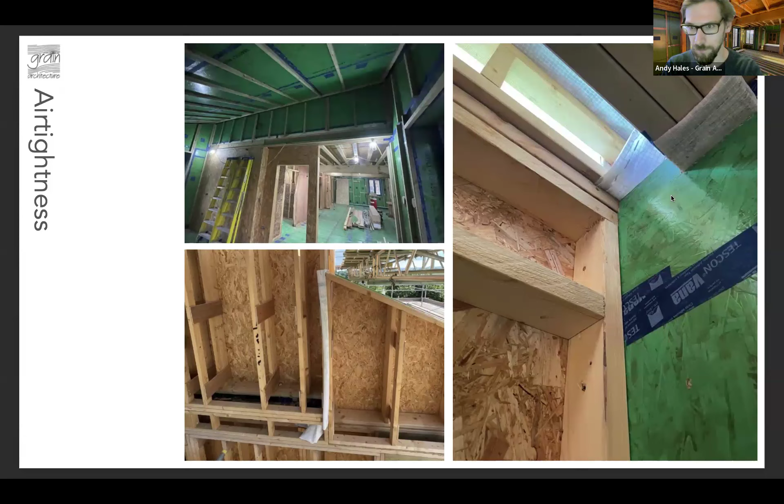So when you've got all your airtight layer complete, including all the windows, with any low energy building it's always good practice, and in Passivhaus essentially a requirement, to do at least one additional air test. You've always got to do an air test at the end of a new building to get building control approval, but to know that you're on the right track, it's much better to do an airtightness test when the airtightness layer is still accessible, so that any errors in it can be fixed at that point.

So the Passivhaus airtightness test standard is slightly more rigorous than the one for building control, in that you have to do a depressurization and a pressurization test, because if you just pull the air in one way, you can actually be pulling membranes tight. So by doing both directions and taking the average, that gets you a much more accurate airtightness figure.

So we did that when we got all the areas sealed, and that's the blower door which sucks air through, and got a figure of 0.28 when the Passivhaus standard is 0.6. So we're slightly better than twice as good as the Passivhaus standard for airtightness, which is great.

There were a few things we didn't quite get straight to that level immediately. There were a few issues that were picked up, and one very useful thing when doing the airtightness test is to have a thermal camera, because you can more visually see the movement of air, which is easier to see when you've got the pressure forcing the air through the building, so you can see the air moving towards any weaknesses in the building.

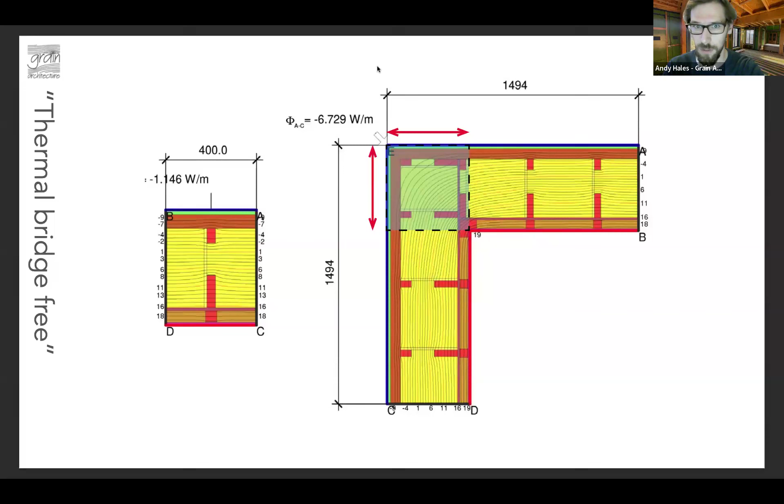If you have a continuous layer of at least 2/3 of insulation all the way around the building, which is what you should be aiming for ideally with Passivhaus, then you don't necessarily need to calculate all the thermal bridges. But there's a few areas where we couldn't avoid thermal bridges, particularly with the screw piles where the glulam ground beams are. The structure from the walls carries on through the floor, so it's not as wide as the ground beam, but there's still a significant bit of timber taking that load down, which is essentially continuous timber from the inside to the outside. So that's the thermal bridge that needed calculating.

However, because timber is relatively non-conductive compared to something like steel as a structure, even though we had this continuous bit of timber going from inside to outside, the overall depth of the insulation and the relative lack of conductivity of timber means that it still comes out overall as a negative thermal bridge on the wall floor joins.

Where the internal walls land on a glulam beam, that is actually a positive one, so they did still need calculating, but by doing this you can get a much more accurate picture of what's happening at all these junctions, which is useful as an architect learning the process of calculating thermal bridges. It teaches a lot about the way heat actually flows through junctions, because it's not as intuitive as you might think. But overall, when I did calculate all the thermal bridges, we ended up overall negative compared to what the U value measurements gave us.

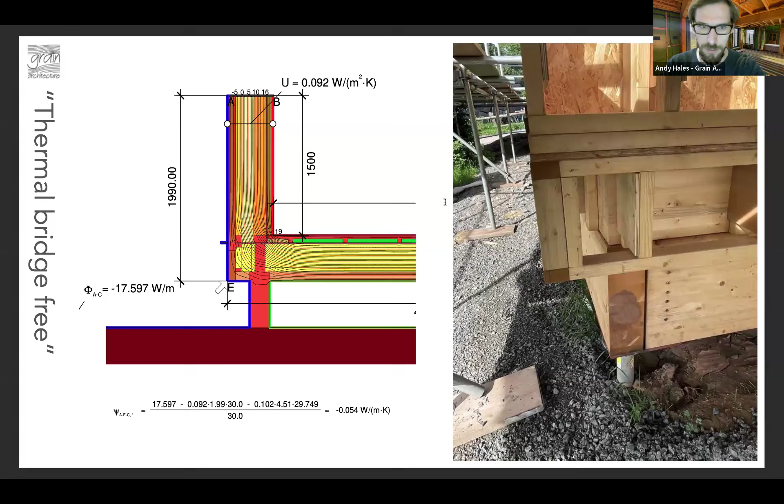One particularly neat area that Janna had mentioned, for reducing thermal bridges, was the detail we came up with for the eaves, which was this splayed batten that Janna's talked about. It had to be 2/3 the length fully supported to enable it to act as a cantilever. But it did enable us to have this quite neat detail where the only fixings for the eaves are the same fixings as the standard batten fixings throughout the rest of the roof, which enables essentially no extra thermal bridge at the eaves, especially when the cellulose insulation carries on wrapping round through that junction.

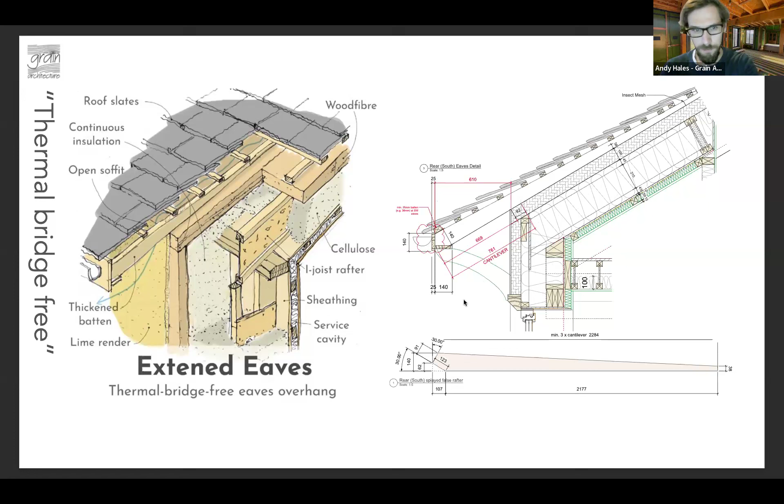Yeah, it ends up with very minimal bridging here. And that's the calculation actually showing it, which again comes out slightly negative compared to the calculations just looking at the areas. And then you can actually see how it's constructed. This is where the external wall joins, but you can see those I-joists, and they're just landing against a ply board, which is that board there. So that's the only sort of big bit of timber in that area.

So you've got very continuous insulation, and then on top of that you've got the rigid wood fibre wraparound as well. So that's the main aim of these sorts of junctions, to have as much continuous insulation as possible. And there you can see the splayed batten in reality, which also kicks up the eaves, which is quite common in traditional buildings as well.

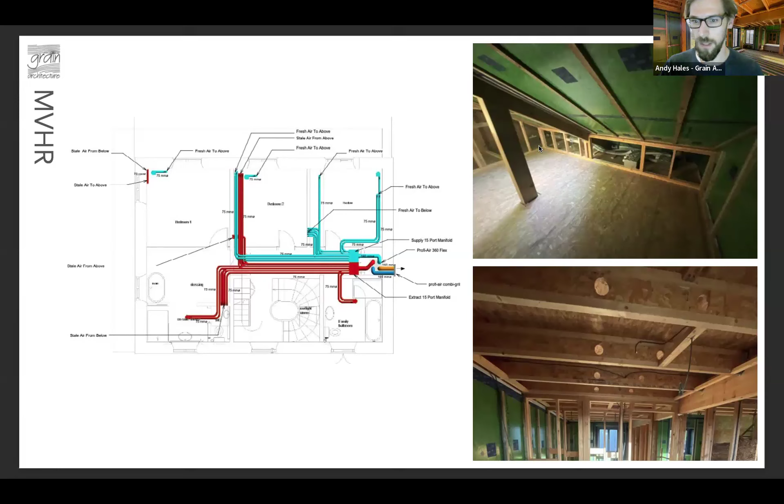So instead of this layout for the ventilation where it was all going through the hallway before spreading out, what we've ended up doing is splitting the ducts to go vertically, and then have ducts running down the eaves in the loft, which is good use of that minimally useful space anyway. And then others running along the spine wall on the ground floor.

And there's the MVHR unit going in, where you see the highly insulated ducts going to the outside. I can't actually remember which one's which, but one's the fresh air intake, and one's the exhaust going outside. And because they are the ducts before the air has been exchanged and after it's been exchanged when it's going out, those are essentially external air. So they are thermal bridges to the outside. So you want to minimize the length of those ducts as much as possible. So you can see there it's a relatively compact and short distance from the heat recovery unit to the outside. And it's all been done and sealed very neatly.

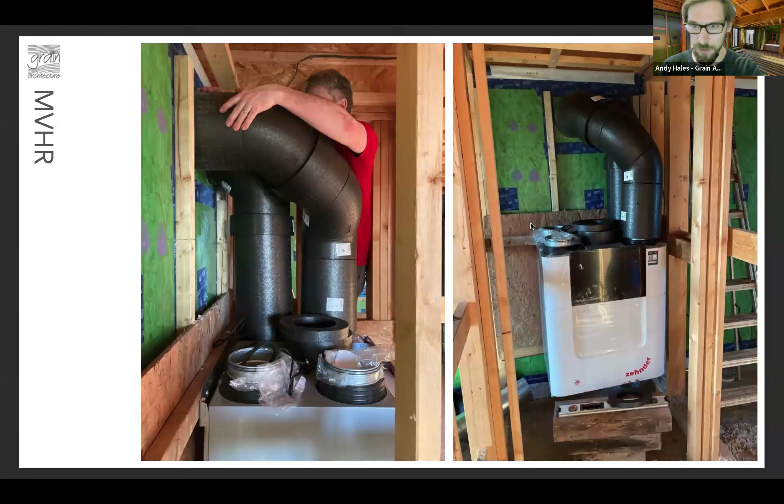So that's how we've achieved these standards. For the airtightness, we've got 0.28, so that's twice as good as the requirement. And this is slightly out of date, actually, it's been updated, but yeah, we're easily meeting the overall heating target. So currently on track to be meeting the standard.

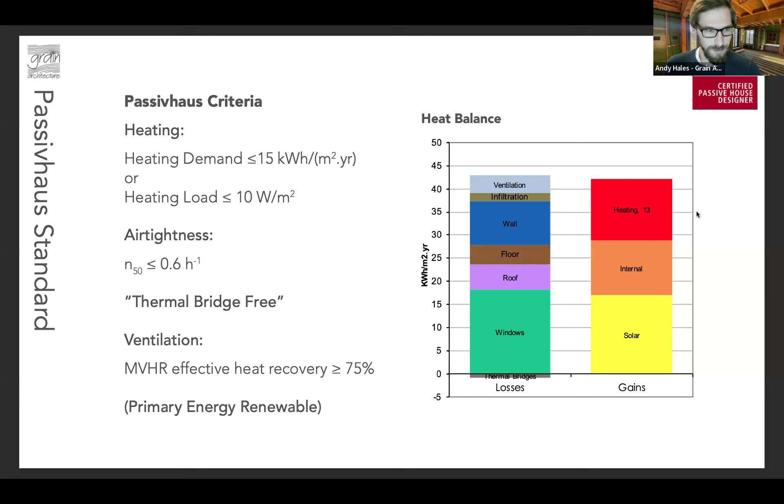Thank you. I'll stop there. That's brilliant, Andy. Thank you. I'm just going to try and add spotlights to everybody, and I've lost Jonathan. He's disappeared now. Promise, I'm here.